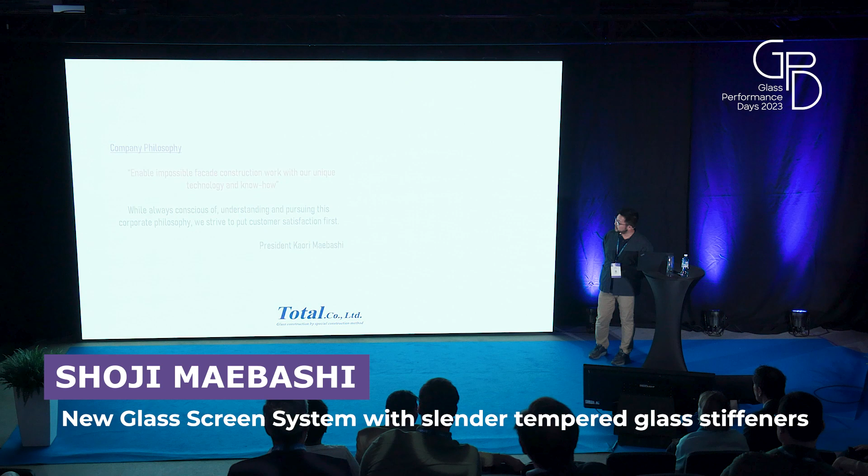I'd like to introduce our company philosophy: to enable impossible facade construction work with unique technology and know-how, while always understanding and pursuing this corporate philosophy. We strive to put customer satisfaction first. These are our president's words.

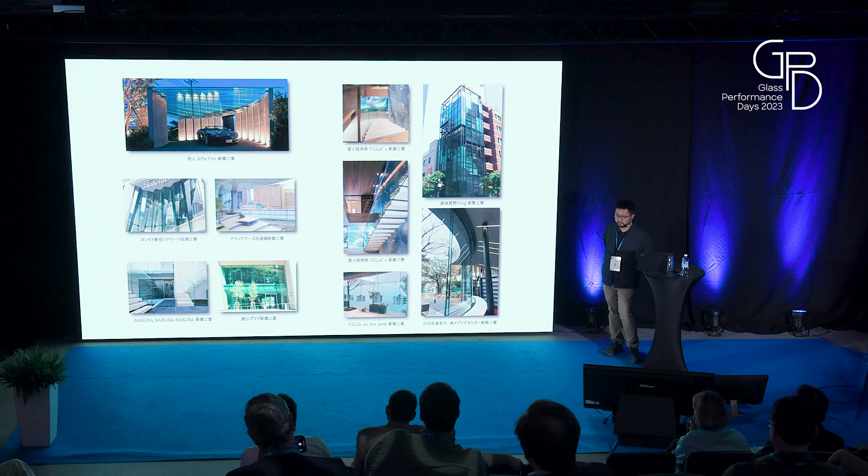Let's talk about the glasses. In recent years, glass has been used for external surfaces in order to realize light, liberating, and highly transparent spaces. These four are the keys for glass architectures: flatness, less deflection, continuity, and transparency.

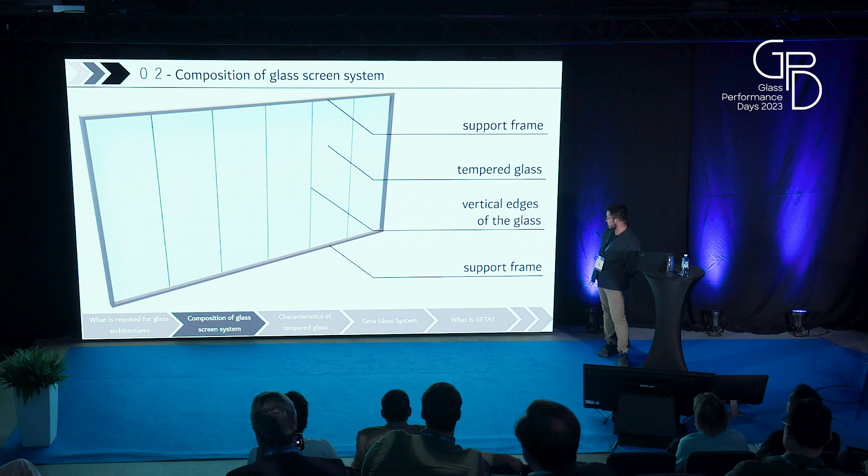Today's glass screen construction consists of a support frame, tempered glass, and vertical edges of glass and support frame, as you can see in the picture.

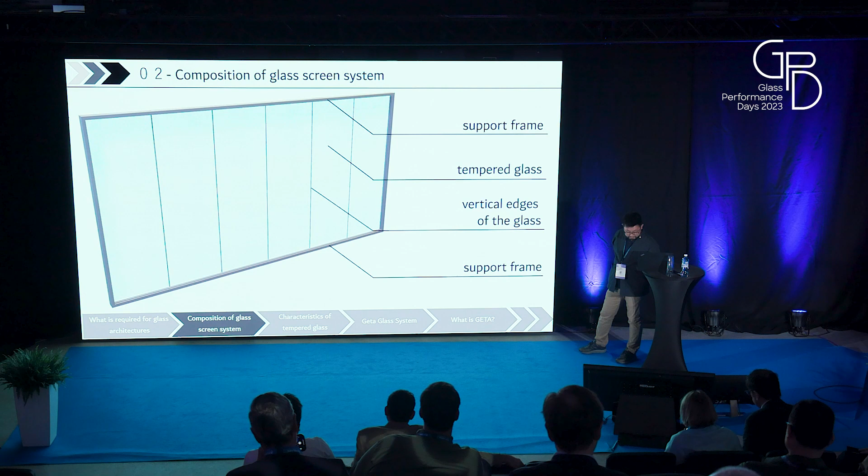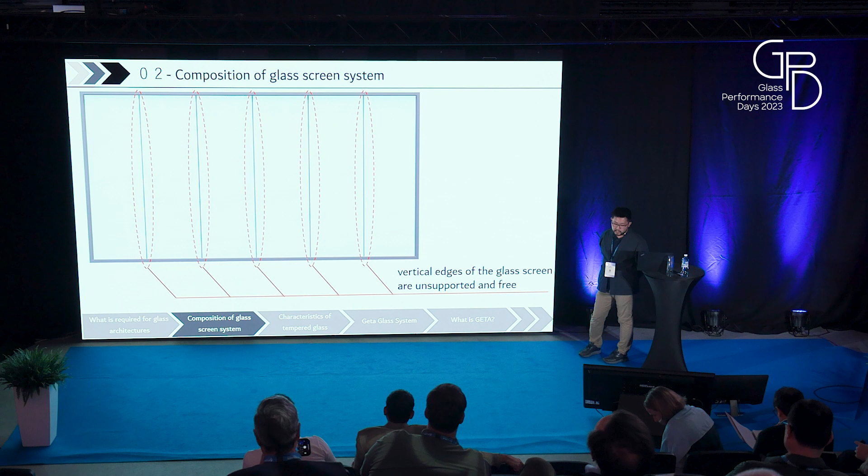These highly transparent exterior glass screen constructions are often supported by upper and lower frame members with free vertical edges.

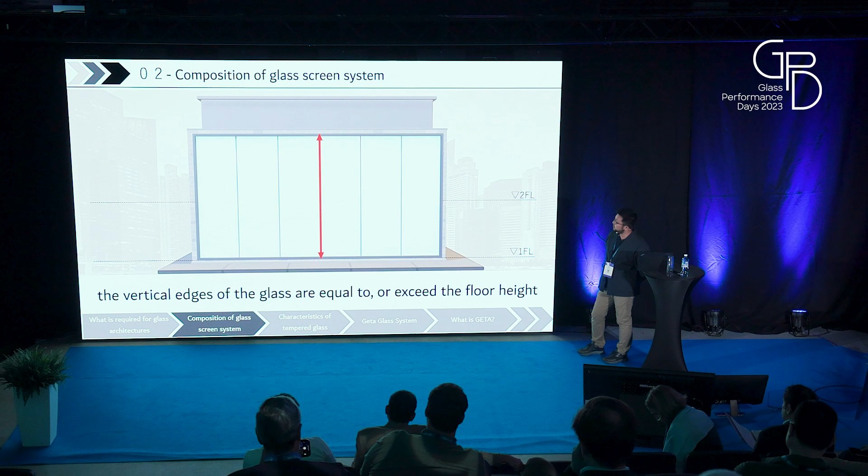Besides, large scale glass tends to be used at this time, where the height of the glass screen is the same or higher above the floor level.

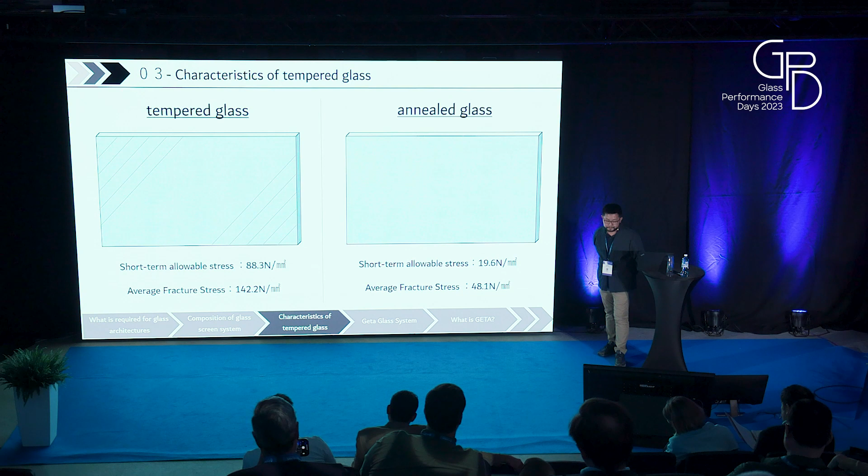However, as tempered glass is made from raw sheet glass and needs to be processed from the same material as annealed glass, the relation of components between deformation and stress are the same, and so are the deformation limits. But tempered glass is strong enough to reach the limits of deformation specification before it breaks.

So in order to utilize the high strength of tempered glass, it is necessary to limit the deformation even if the generated stress is high.

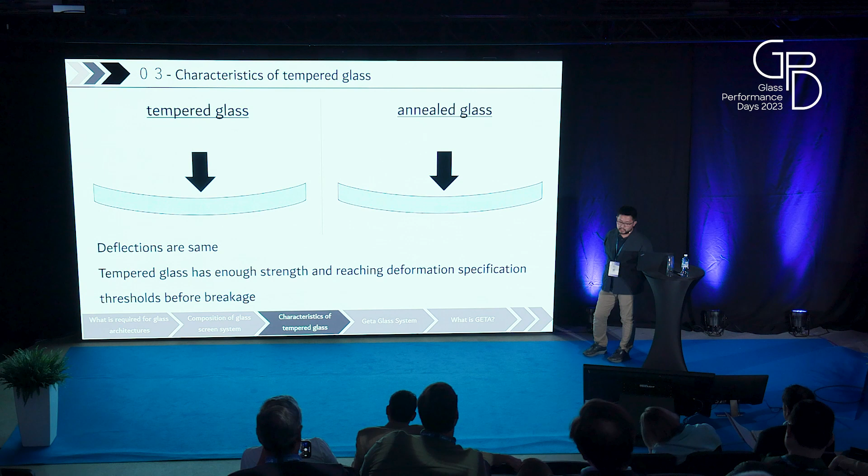With such conditions, a new glass support construction method, which involves attaching slender glass stiffeners to the vertical edges of the glass, makes use of the high allowable stress of tempered glass, improves cross-sectional performance, and reduces deformations.

This shape allows for increasing bending rigidity. Since this is a method of supporting glass by frame material above and below the face glass, it is possible to avoid stress concentration at the top and bottom edges of the slender glass stiffeners.

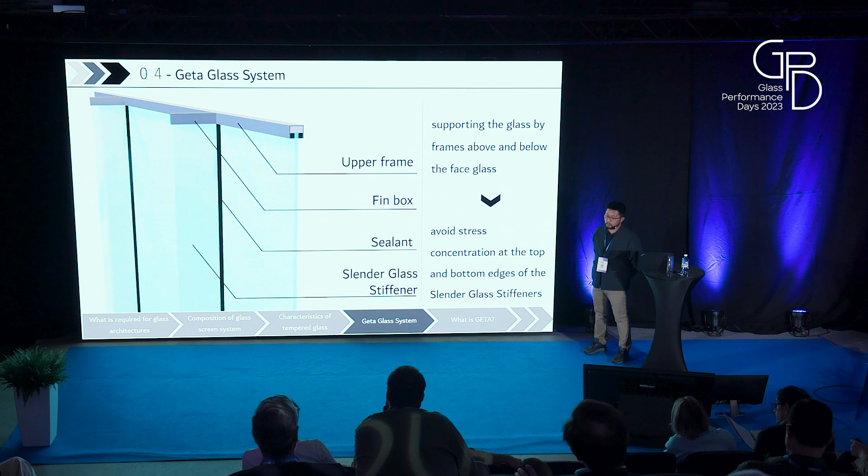So one of my friends is coming to the stage.

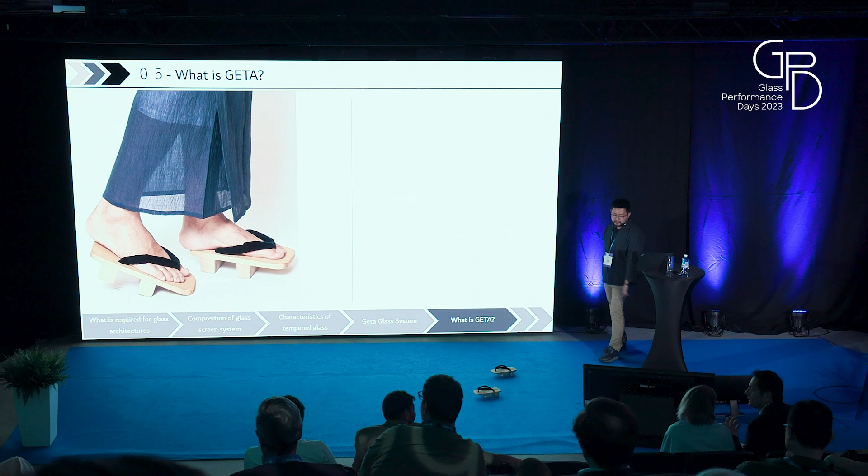Okay, so this is called GETA, a traditional footwear that has remained for over 2,000 years. And as you can see, this also has two teeth to increase stiffness, like this.

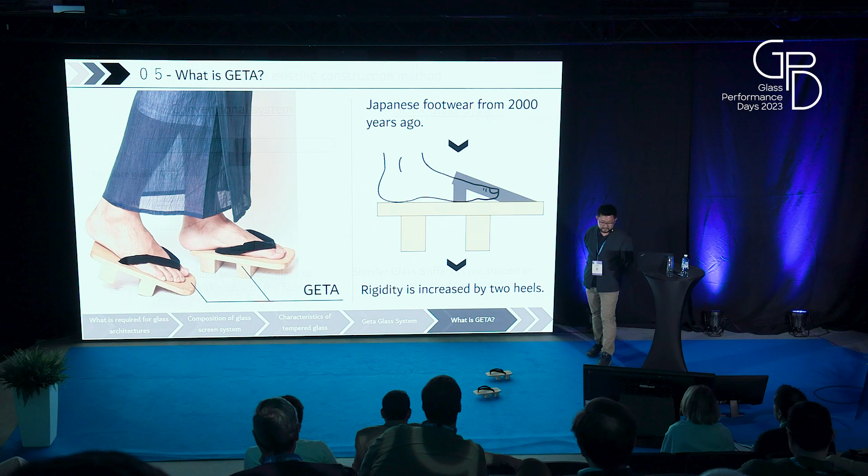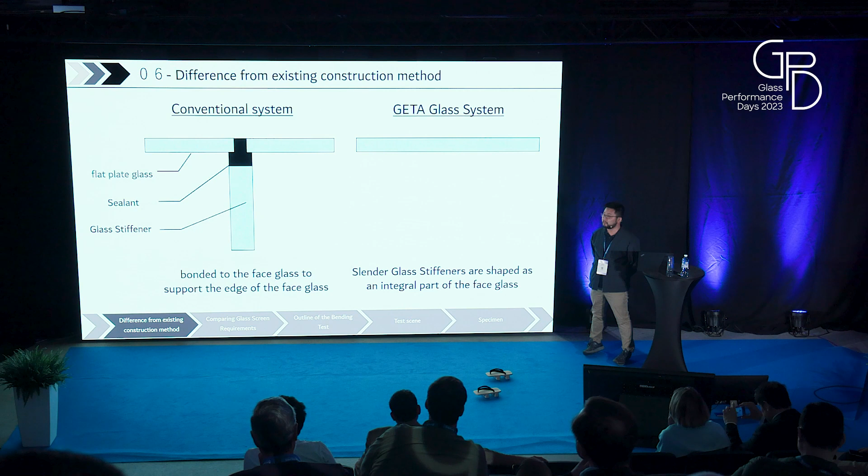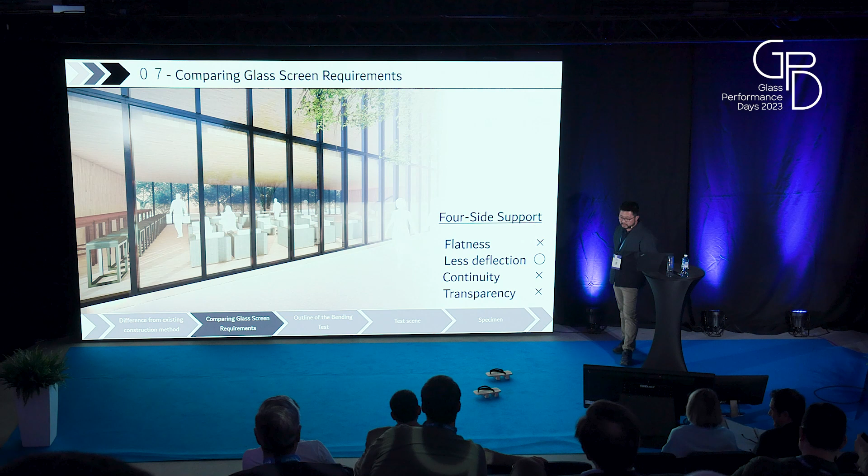As we compare the GETA glass system with other edge-supported methods, the four-sided support construction method has less continuity and transparency, although deformation is reduced. With two-side supports, this construction method provides continuity and transparency, but increases the amount of deformation. So it's not that smart either.

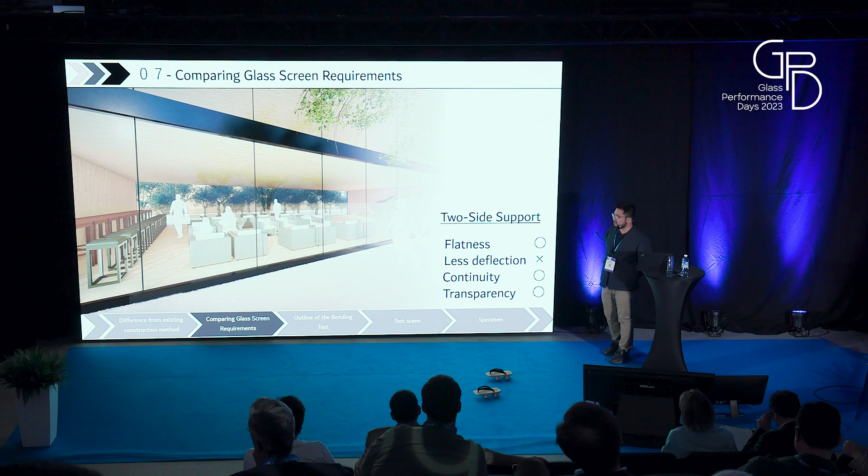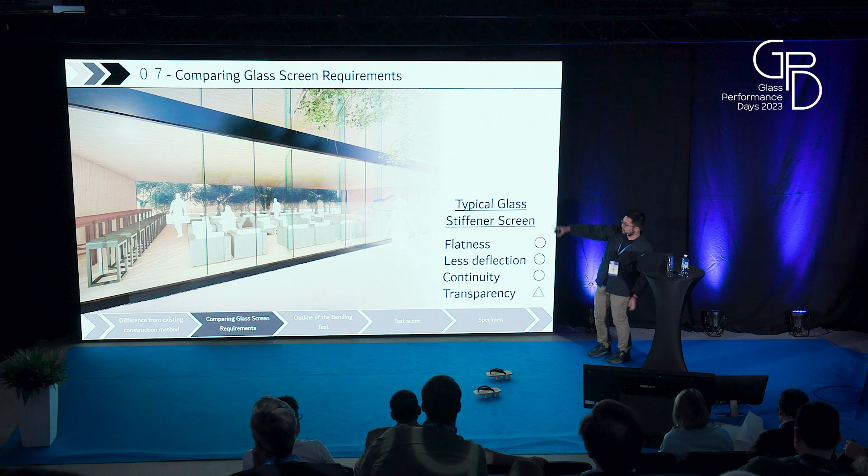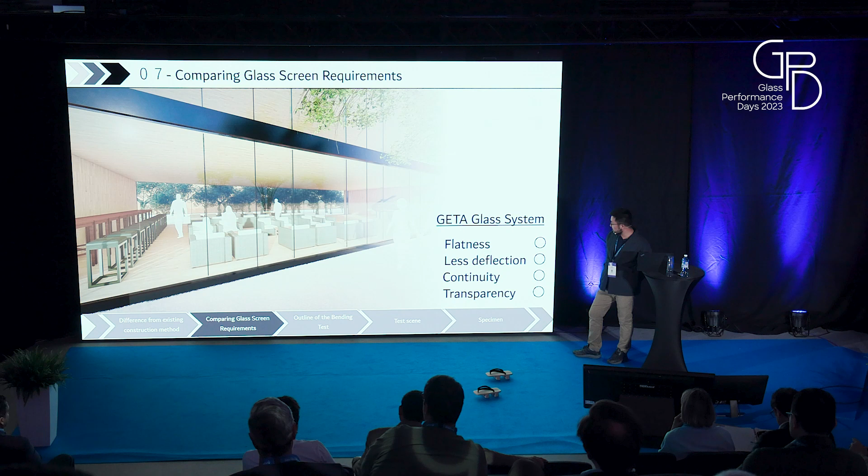Conventional ribbed glass construction helps reduce deformation more than the two-side supports, but it lacks transparency, as you can see in the photo. But the GETA glass system allows for a smaller prospective dimension of the slender supplementary glass compared to the ribbed glass construction, which results in greater transparency. So everything's good and it looks cool.

The purpose of this study is to obtain basic data on the mechanical properties of the GETA glass system by testing and analytically verifying the integration of flat glass and slender glass stiffener for the practical use of the GETA glass system. For the analysis, elastic analysis was performed, and the test results of the bending test were compared with the analytical value.

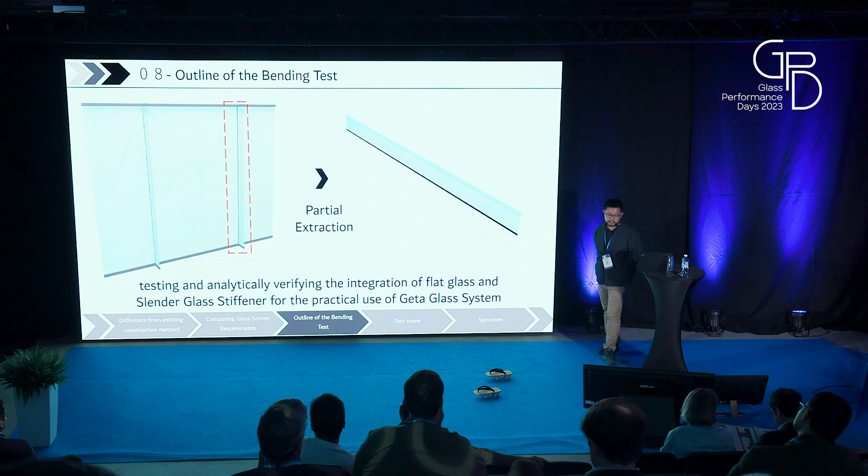This is how the experiment was done, using the Amsler type compression testing machine. It was used to conduct a 3 equal length, 4-point bending test.

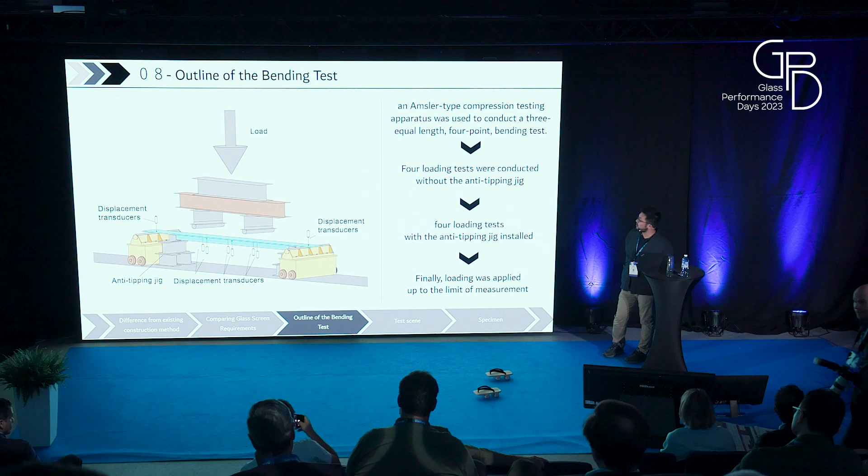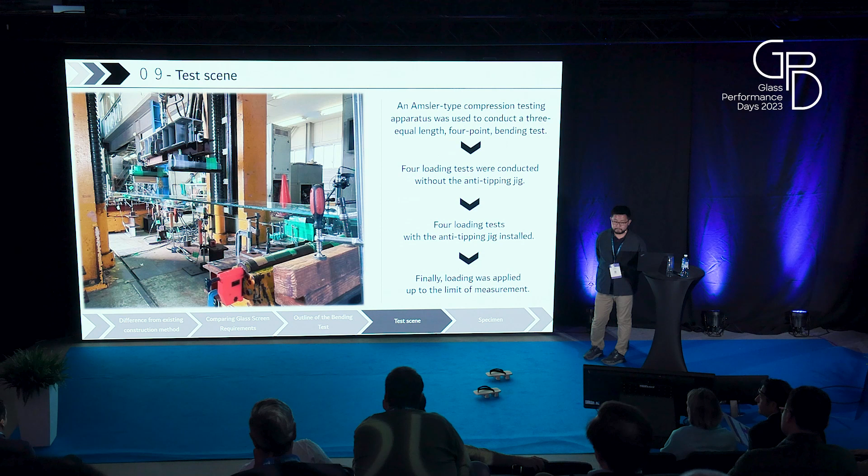This is how the test was done in our lab. The thickness of the sealant is 20 millimeters, and the sealant used is silyl-terminated polyacrylate sealant. The dimensions of the slender glass stiffeners are 80 millimeters by 3,000 millimeters by 15 millimeters, and the dimension of the glass is 300 by 4,000 by 12 millimeters.

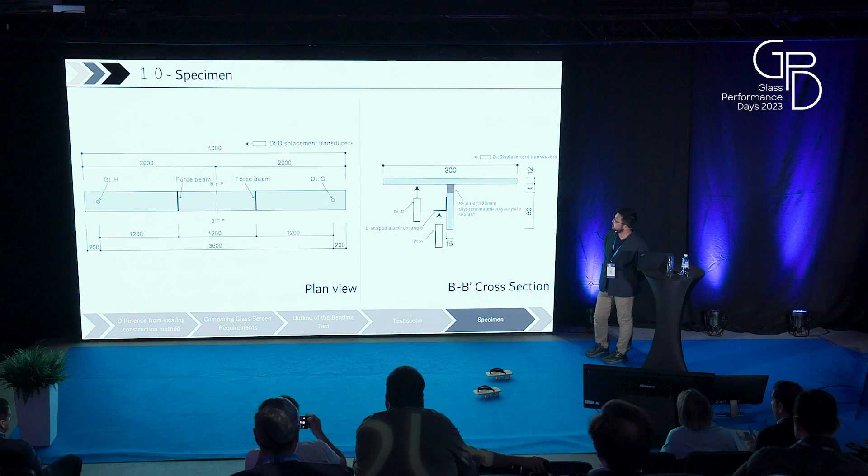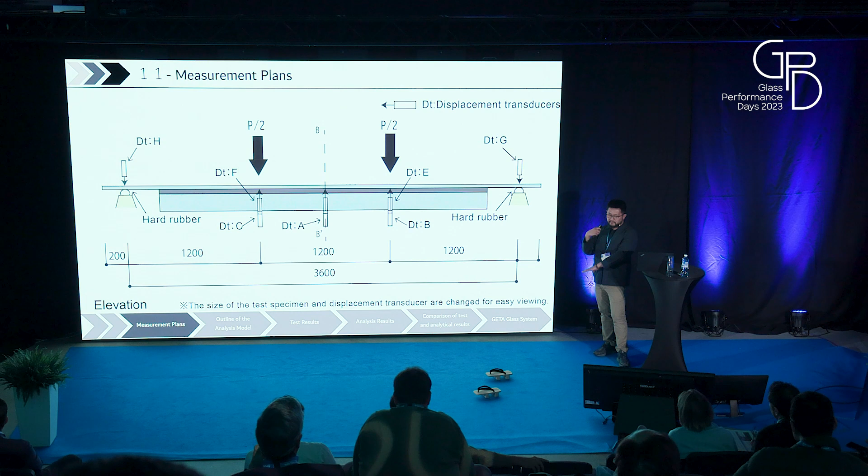To prevent the specimen from being damaged at the point of contact with the testing machine, hard rubber of 3 millimeters thickness was placed between the flat glass plate and the force application area, and between the flat glass plates and the support points.

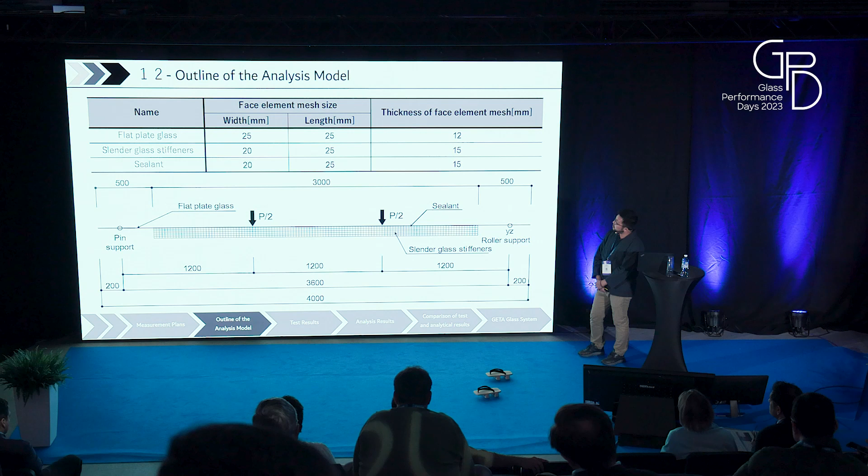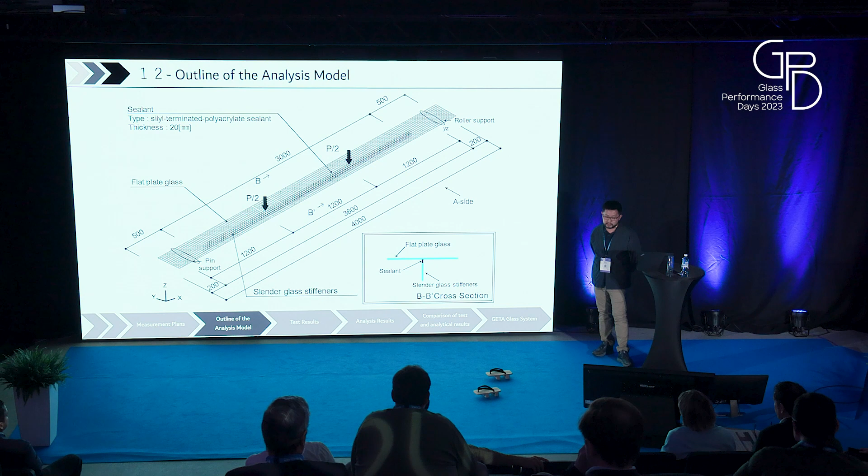Here's the overview of the analytical model. For the loading of this analysis, an elastic analysis is performed by setting up a concentrated load at the force points. The force is applied at the points where the distance is divided into 3 equal sections, which is 1,200 millimeters from both supporting points.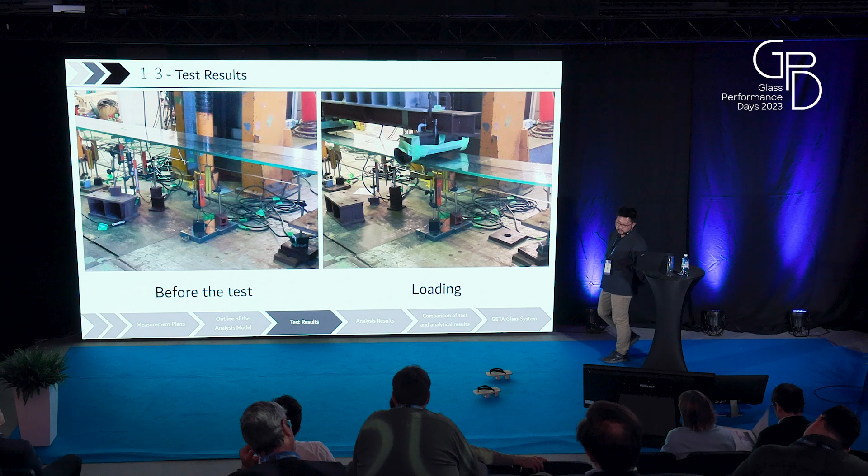This is how the test specimen was operated, from the left, which was before, and to like this.

This is the load-related deformation curve obtained from the bending tests. The vertical axis indicates the applied loads, and the horizontal axis indicates the relative deformation. The test shows that the stiffness value of the flat glass with stiffeners was 8.7 times higher than without stiffeners, which means a composite effect was obtained by bonding the slender glass stiffener.

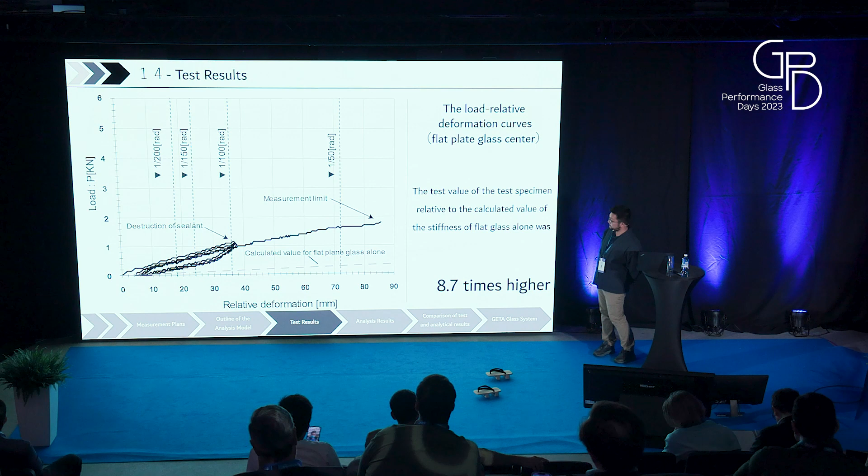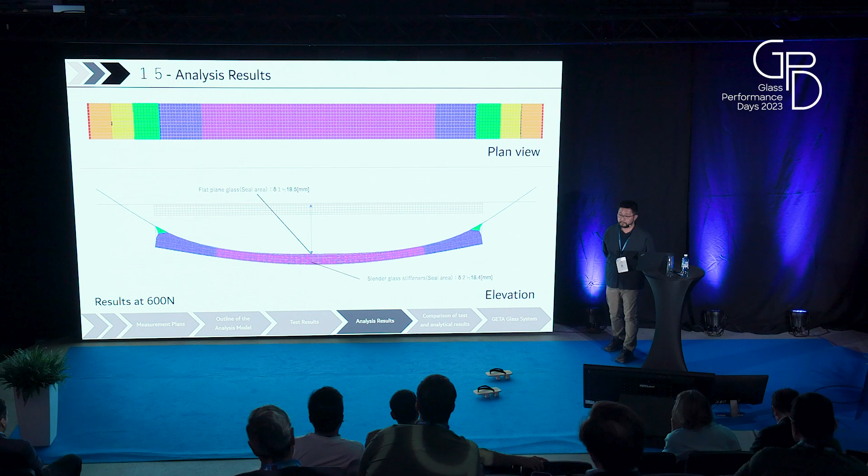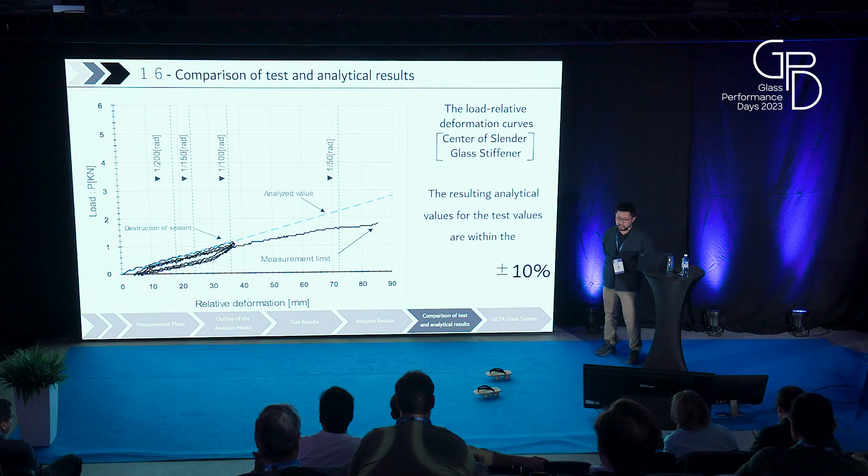And this is the analysis result. We also compared the analytical values and test values obtained from the bending load experiments, and here is the analysis result. As a result, we could confirm that the difference between the test specimens with flat glass at the spot point location and the initial stiffness of the analytical model was within the range of 10%.